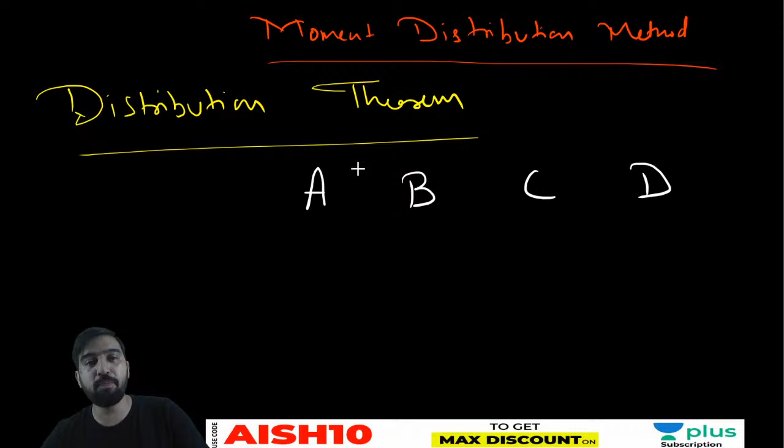See my dear friends, I'm starting in the same manner by which I started in the marathon. So, distribution theorem - it is a story of 4 persons who are staying in a room, sharing a common room, and they are taking lunch or dinner together.

The capacity of A is taking 2 rotis, B can take 4 rotis, C can take 6 rotis, and D can take 8 rotis. So the total number of rotis which they 4 can take together is 20.

Is it clear? Okay, now what is happening? One day, due to some reasons, the available rotis were only 10 in place of 20.

So now tell me, dear friends, what would be the distribution? So will all A, B, C, D take rotis in proportionate amount, or will D take 8, A take 2, and B and C remain hungry? How is it going to be?

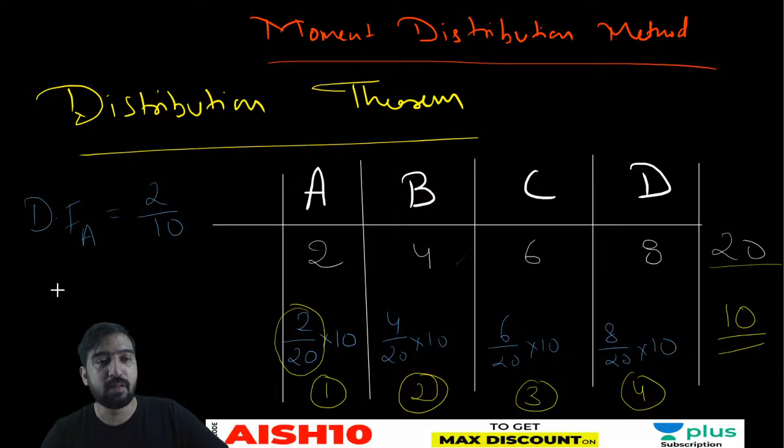If I write here, distribution factor for A is 2 by 20. Distribution factor for B is 4 by 20. Similarly, for C, it is 6 by 20, and for D, it is 8 by 20.

Isn't it? Okay, so what is the methodology to get the distribution factor? Here you have seen the individual eating capacity of A, and when the total number of 20 rotis were available, he was eating 2. So individual eating capacity of a person divided by the sum of eating capacity of all the persons staying at a place.

Similarly, the distribution factor of B is the individual eating capacity of B divided by the sum of eating capacity of all members staying there. So if you add the distribution factors of A, B, C, D, you will get 1.

If you are not getting 1, it means you have committed a mistake. So the sum of distribution factor available at a location is equal to 1. For joints, we will be transforming it.

So, distribution factor - how do you define it for a particular thing? Individual capacity divided by sum of capacities. In layman language, you can write distribution factor like this. Now, my dear friends, I am simply transforming it.

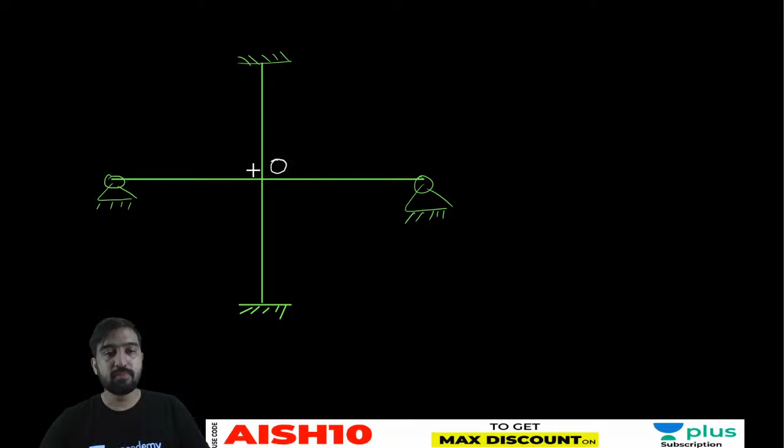Now come to the structures. See my dear friend, suppose I'm having a joint here on which four members are joining. Let's say it is first member, second member, third member, and fourth member. Name this joint O. So it is A, B, it is C, and it is D. Is it visible now, Harshit and Mahima?

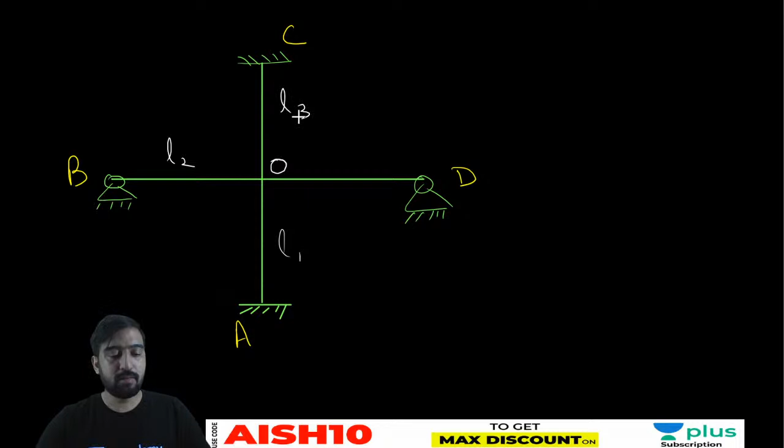So now my dear friend, let's say the length of these members be L1, L2, L3, and L4. And let's say their stiffnesses will be E1, I1, E2, I2, E3, I3, and E4, I4. Okay, so this is a scenario.

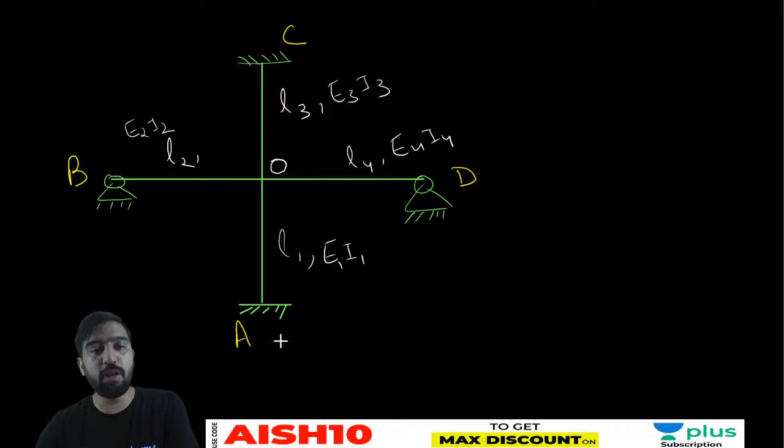So now, if I want to know the stiffness of OA, how can I write it? Tell me, what is the stiffness of OA? Please tell me fast, all of you. What is the stiffness? Yes, 4EI by L. Very good. 4E1I1 upon L1.

Similarly, write it for OB, OC, and OD. Fast. For OB... Okay good. And for OC, it is 4. And OD, it is 3. Okay, yes, it is going to be like this.

So you can consider these stiffnesses as the individual eating capacity of a member. Suppose if I ask how much OA can eat, how many rotis it can eat, you have to say it can eat 4EI upon L1, like that, in normal condition.

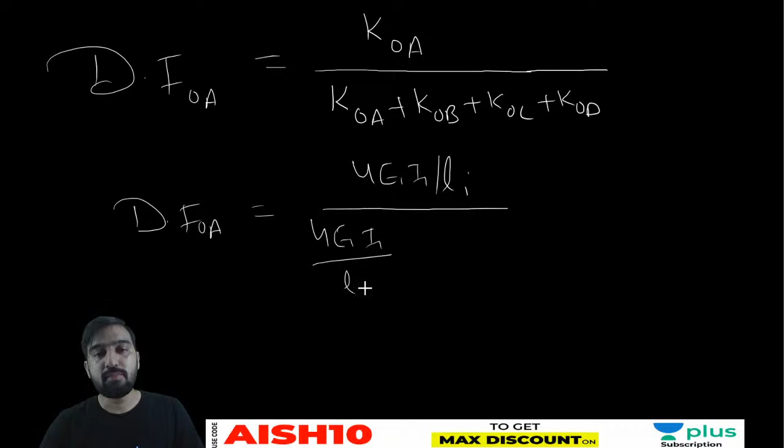So the distribution factor for OA, my dear friend, would be 4EI by L divided by 4EI by L plus 3EI by L, because for OB it is 3EI by L, plus OC 4EI by L plus OD 3EI by L. Okay, so this is the distribution factor, this is the exact way of calculating it, or you can write it like this.

Distribution factor of OA is K-OA divided by the sum of the stiffnesses available at joint O. Is it clear to all my dear friends or not? Say yes or no, please tell me.

So I am representing this big expression with summation of K. So whenever I am writing summation of K, you have to understand it is equivalent to this. I am not going to write all this again and again.

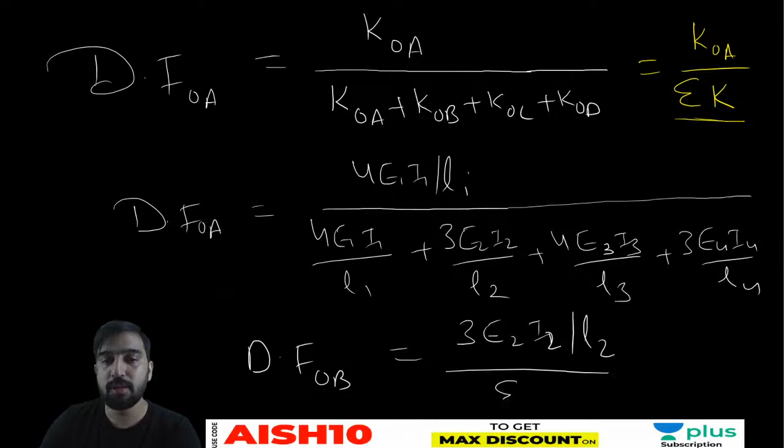So similarly, my dear friend, if I want to write the distribution factor for OB, it is 3EI by L upon sum of the stiffnesses. Similarly, for OC, and similarly for the last one, OD, it is K-OD divided by summation of K. Is it clear to all my dear friends?

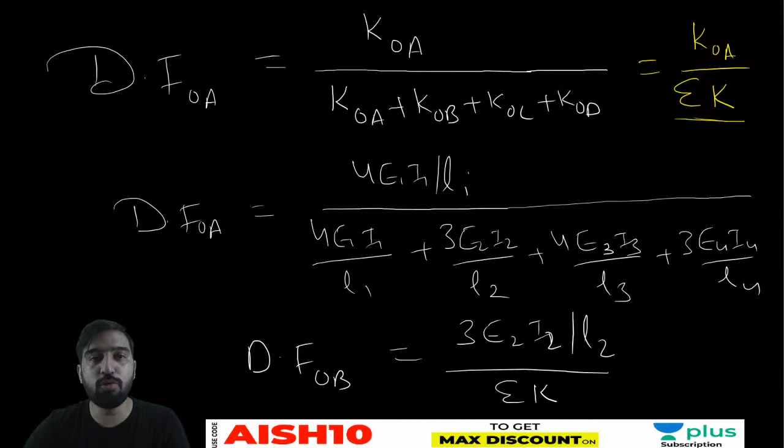And yes, obviously, if you are doing the sum of the distribution factors, the sum of distribution factor at a joint is equal to 1. Suppose you want to do the sum of distribution factor at joint O, then it will be DF-OA plus OB plus OC plus OD, and the denominator portion for all these 4 members is same, and the numerator simply gets added. So the sum of numerator will also be equal to K-OA plus K-OB plus K-OC plus K-OD, and if you add them up, you get the value 1. So the sum of distribution factor available at a joint is equal to 1. That is the funda here. Is it clear to all my dear friends? Tell me, is it clear to all?

One important note here: the sum of distribution factors available at a joint is equal to 1. So now my main task is, for which I am going to study all these things: if I am going to apply some moment at joint O, suppose here OA, OB, OC and OD.

For example, let's say the distribution factors are 0.3, 0.2, 0.3, 0.2. You can see the sum is equal to 1: 0.3, 0.2, 0.3, 0.2.

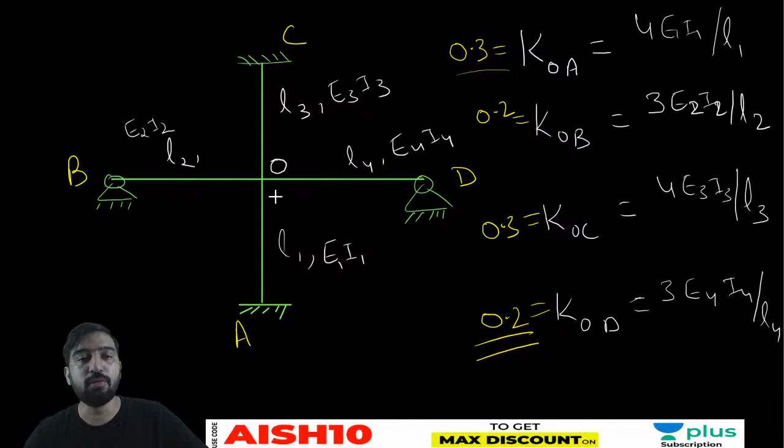Now my question is, listen to me carefully. I have assumed this value, 0.3, 0.2, 0.3, 0.2. So now if I am going to apply a moment of 100 kilonewton meter at joint O, then what would be the bifurcations? How much moment is going to transfer in member OA, OB, OC and OD? Tell me.

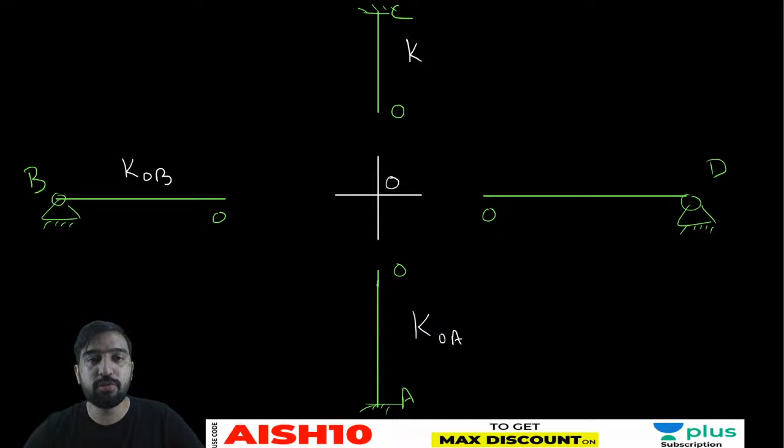So stiffnesses here were 4EI by L. Let me call it simply KOA. Now you all know how to write KOA, how to write the distribution factor of OA. Stiffness here were KOB, it is KOC, it is KOD, and you know how to calculate the distribution factor here.

So distribution factor here would be DF OA, it is DF OB, it is DF OC, and it is DF OD. I hope you now know how to calculate DF OA, OB, OC and OD.

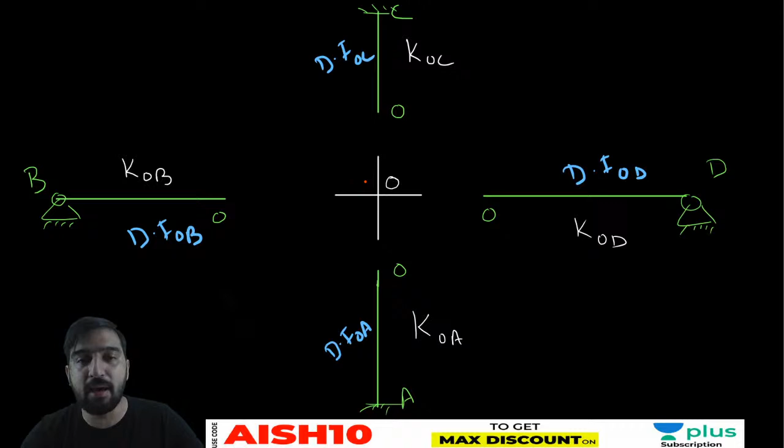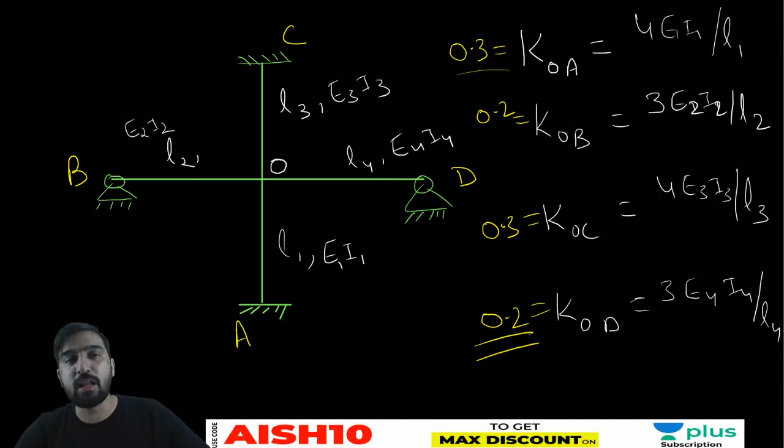So now, my dear friends, if I am going to apply a moment M here, let's say I am applying a clockwise moment M naught, then this M naught is actually claimed by all four members, and in what amount they are going to claim, they will claim as per their particular distribution factor. In the very first example by which I started my class today, the distribution factor for A was 2 by 20, when 10 was available there.

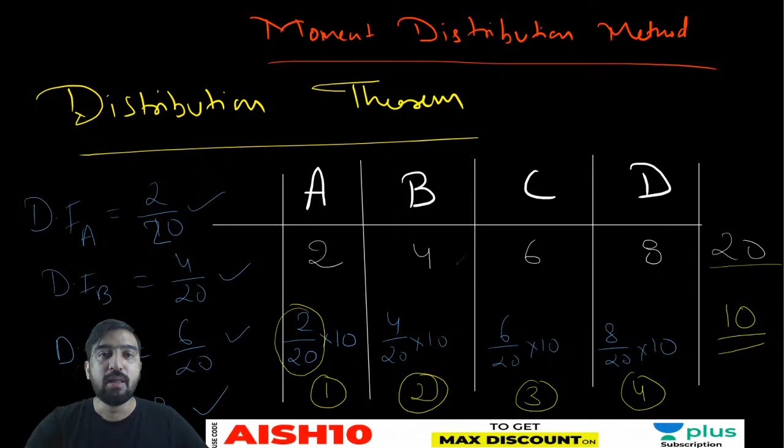So how do you determine the number of rotis there? 2 by 20 out of 10. Now distribution factors here are known for all these four members OA, OB, OC and OD. So now if I want to know out of this M naught how much is going to transfer to OA, to OB, to OC, to OD, then again you can calculate them as per the distribution factor of OA, OB, OC and OD. Similarly, if I want to write the distribution factor of OA, you know it is KOA divided by summation of all these stiffnesses.

And similarly, now if I want to find the moment carried at O, let's say it is MOA. So how can I write MOA? Please tell me if you are agreeing with me. MOA is going to be equal to distribution factor of OA into moment. Similarly, if I want to know what is MOB, then how can I write MOB?

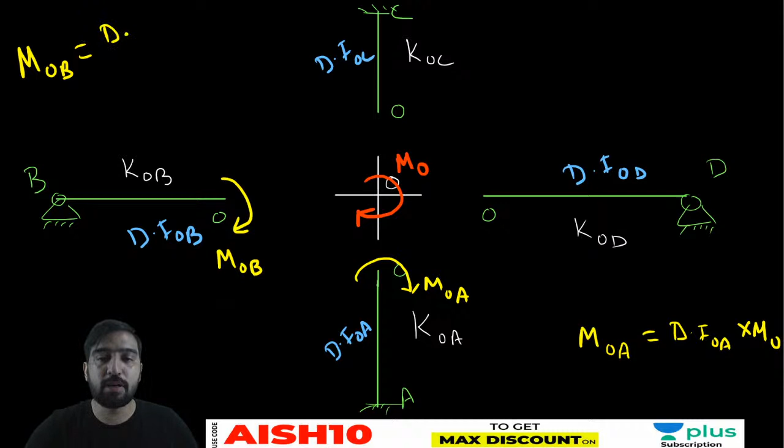So MOB is equal to distribution factor of OB into M naught. Similarly, if I want to write MOC, it is distribution factor of OC into M naught. And yes, if I want to write MOD, then MOD is also equal to distribution factor for OD into M naught.

Okay, is it clear to all my dear friends? Tell me. Okay, and this is clockwise. It is also MOB, it is also MOC, MOD, MOC. Is it clear?

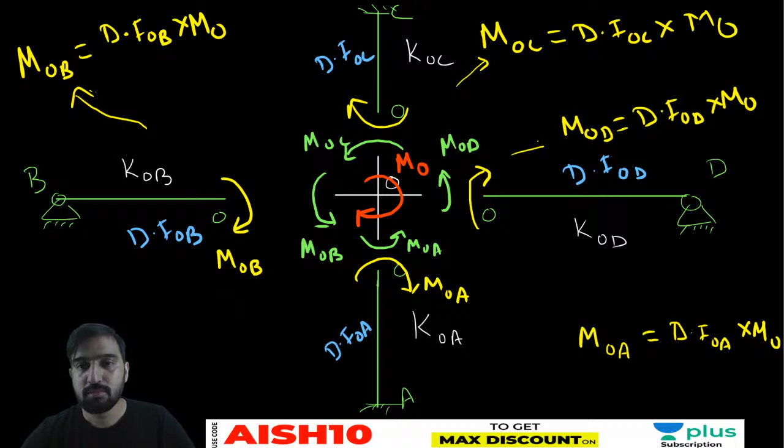Is it clear to all? So I have given KOA as 0.3 and M naught was equal to 100. So 100 into 0.3 is 30. So like that you have answered. Is it clear to all, my dear friends? Please let me know if you are having any doubt so far.

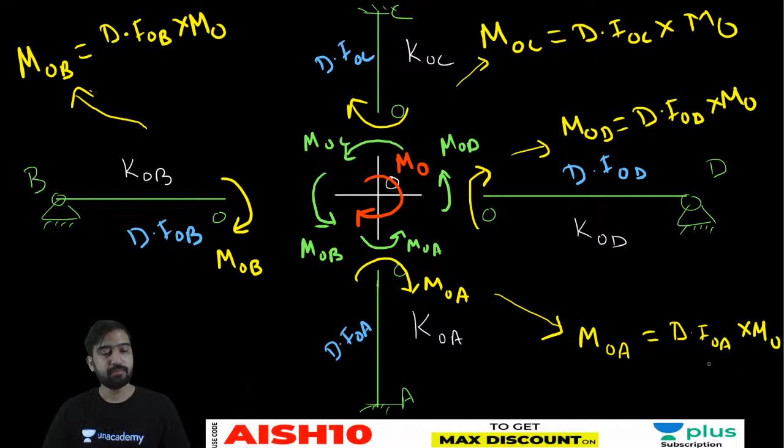So a lot of new names I have seen today. Have you gone through my earlier videos? Swati, Astha, Annadurai, Piyush, okay started 2-3 days earlier, Shri Joshi. So guys, have you gone through my earlier videos? Okay, okay, great.

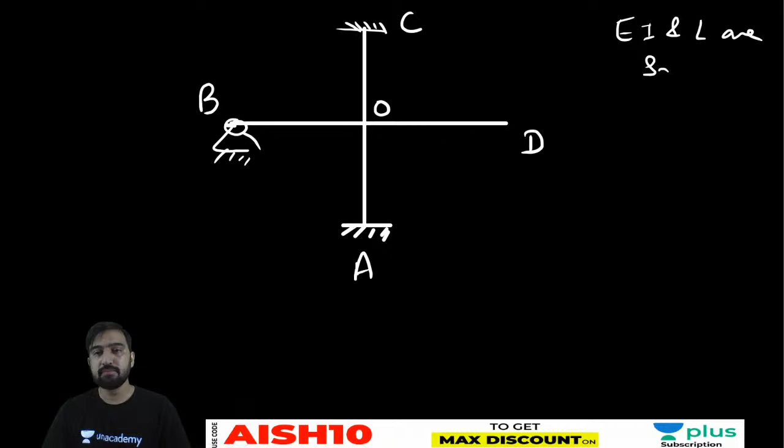Just tell me the distribution factor for all these four members. EI is same for all four members, EI is same and length is also same. EI and L are same for all members.

Just tell me the distribution factor, my dear friends. Thanks, Shri Joshi, thanks.

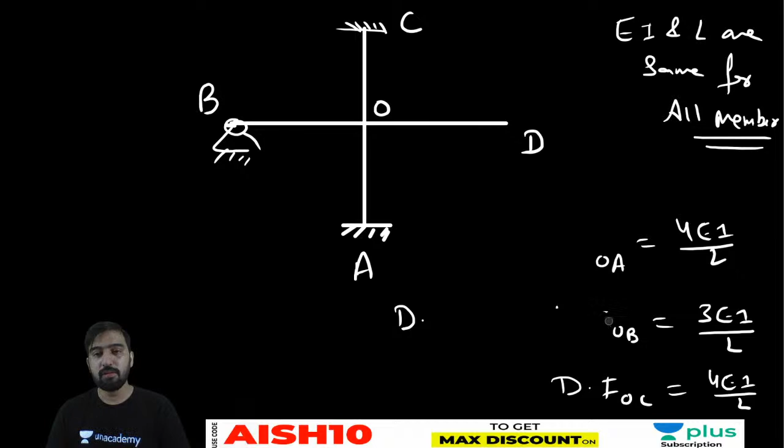Okay, so based on this, its distribution factor would be 0. So it is 4, 7, 11, so 4 by 11, very good. Very good, Shubham. Ayush, good, 3 by 11. 4 by 11, yes, very good.

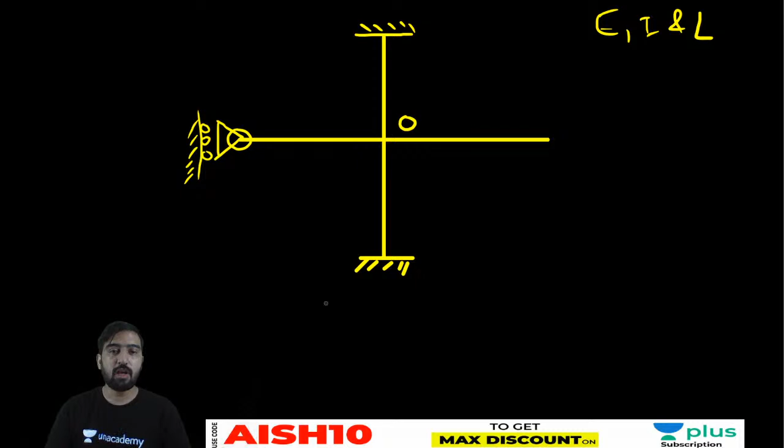Now tell me for this scenario. Again EI and L is same for all these four members. Now guys, tell me the distribution factor for OA, OB, OC and OD. Fast. EI and L is same for all four.

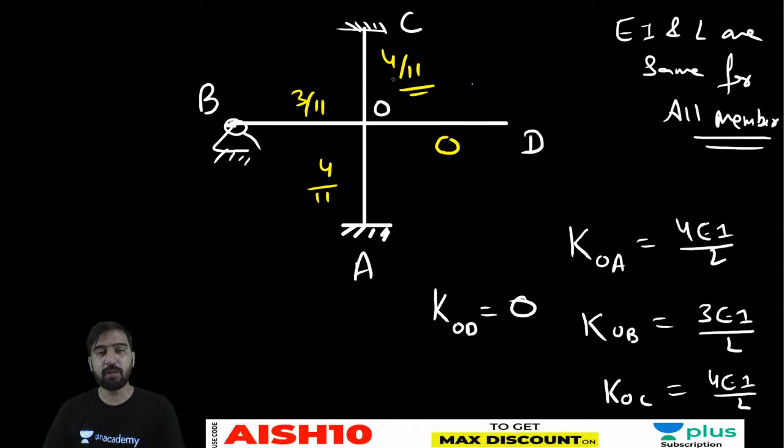Akash, you are saying 3 by 8, for what? 3 by 8? No, it is 3 by 11, my dear friend. It is 3 by 11 only, not 3 by 8. Very good, Shubham, very good, Shubham, very good.

OA and OC, you are saying it is 4 by 11. No. Okay, Ayush, no problem. Yes, Mukesh, Shubham right. Piyush right.

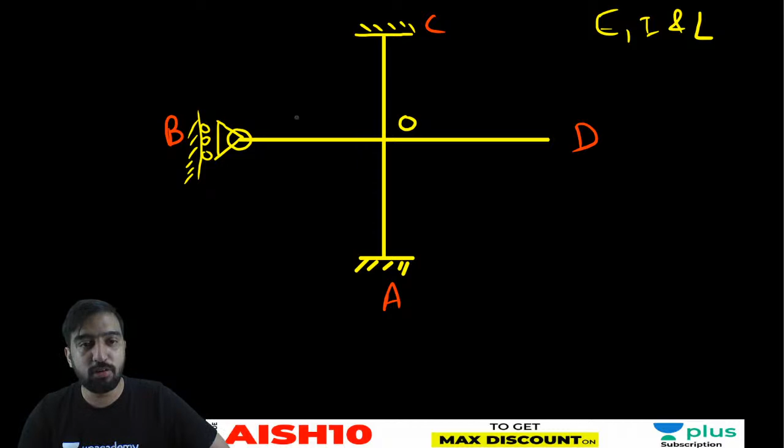So this is 0, this is 0, this is 4EI by L, this is again 4EI by L. So now when it comes to the distribution factor, it is going to be 0.5, 4 by 8, 0, 0.5, 4 by 8 and 0, isn't it? So it's not about roller or hinge, it's about the orientation. Along this orientation, it is free to rotate.

And similarly, my dear friend, I am just changing the question. I hope it is clear to all. I am just changing the question. Suppose D is like this. Suppose D is like this. Now tell me, what is going to be the distribution factor? All of you, tell me, my dear friends. E, I and L is same for all. What is going to be the distribution factor? Please tell, my dear friends. This one is interesting.

Okay, only OB is 0, Piyush is saying. What about others?

Four, four, three. Four, zero, four, three. Very good, awesome, good. See here.

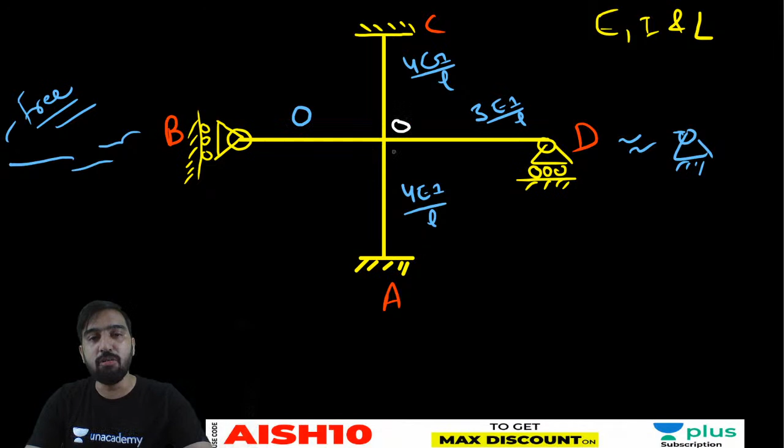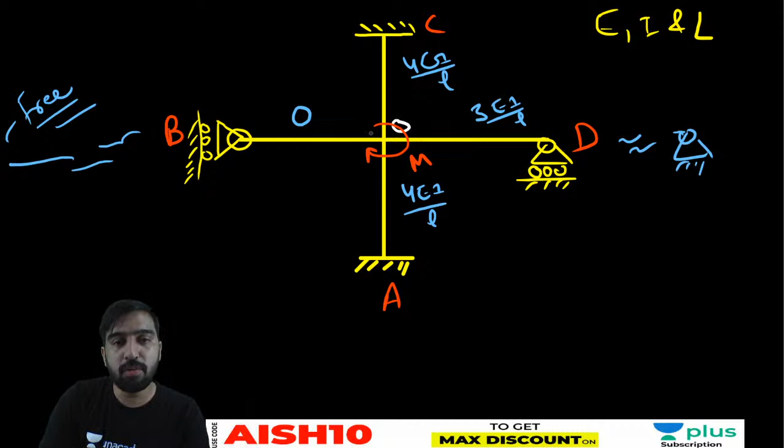Then it would be like this. It would be like this. Okay, and it would be like this, and it would be like this.

So is it understandable? Is it understandable, Mahima? Is it okay, Mahima?

So see, no constraints are here. The roller support is simply going to translate. Is it clear? So I am saying, in spite of having similar support conditions at B and D, D was able to resist this movement, but B is not.

Here B is also roller hinge, here D is also roller hinge, but it is acting as a hinge support while the other acts as a free support. Because by providing this roller, there is no benefit of providing this hinge.

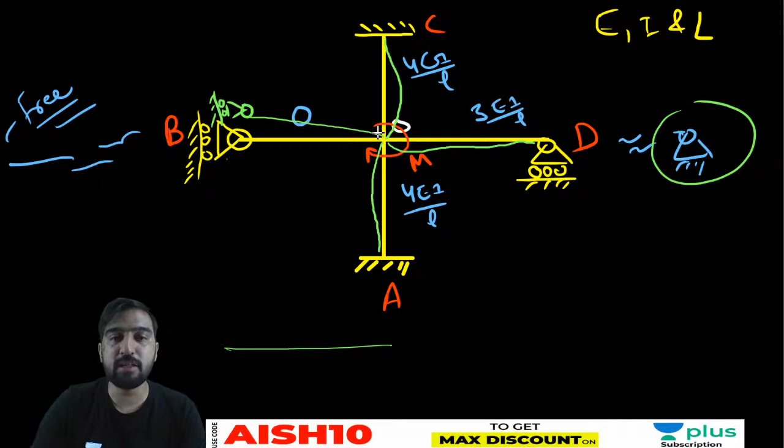Okay let me explain this, Akash. In the one where a roller was given, yes my dear friend, theta would be same. You can calculate theta here, you can calculate theta here, you can calculate theta here. So theta has to be same. If a joint is rigid, so theta has to be same.

A good book for practice is Ramamrutham, n number of questions are there, very good book, Ramamrutham, for practicing. And if BC Punmia is there, still it is fine, but the quantity and varieties of questions are larger, are more in Ramamrutham.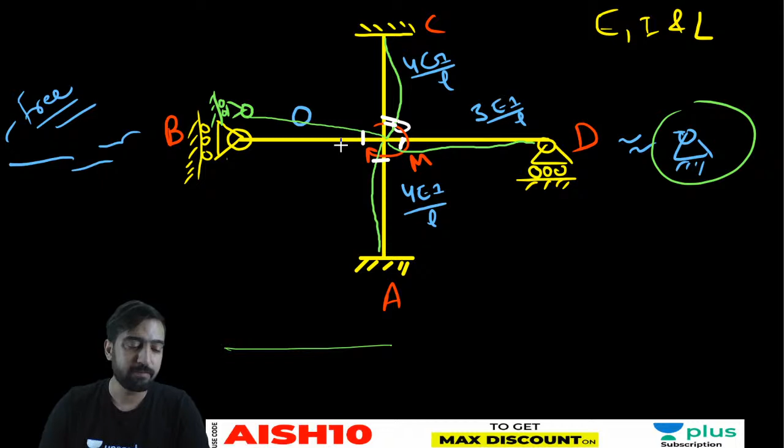So my dear friends, BMD will be discussed only for that question which will be on demand. So by default, I am not going to discuss the BMD.

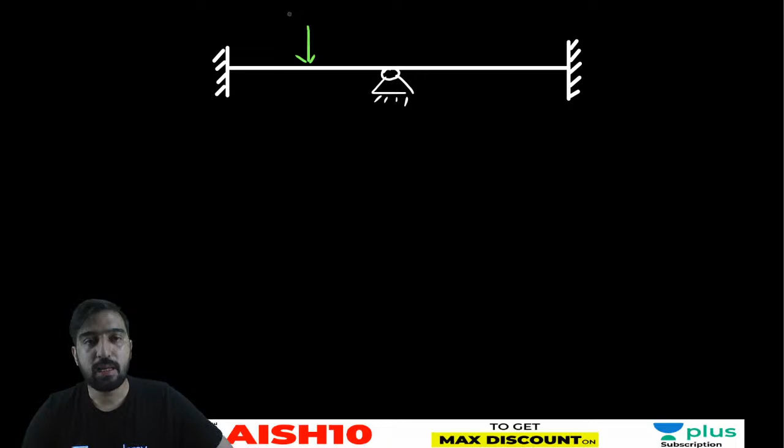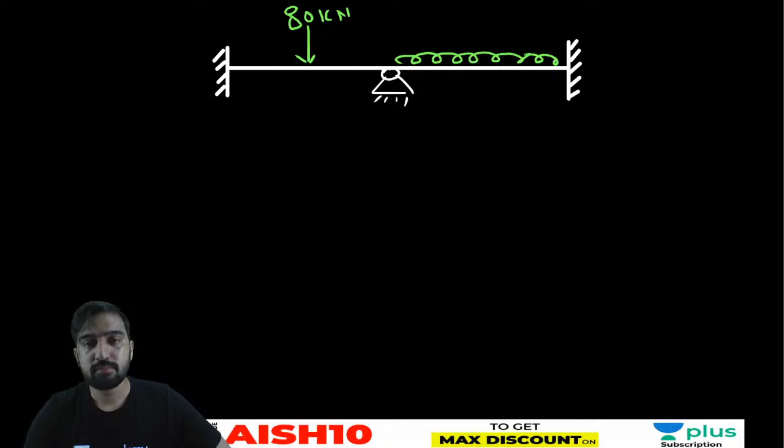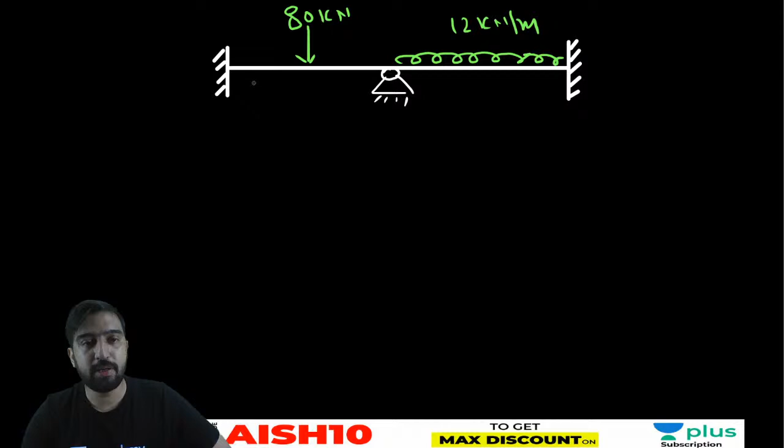So let's say your loads are 80 kilonewton and 80 kilonewton, and let's say it is 12 kilonewton per meter. So it is 4 meter, 4 meter, and let's say it is 10 meter. Okay, keep it 8 meter. Keep it 8 meter.

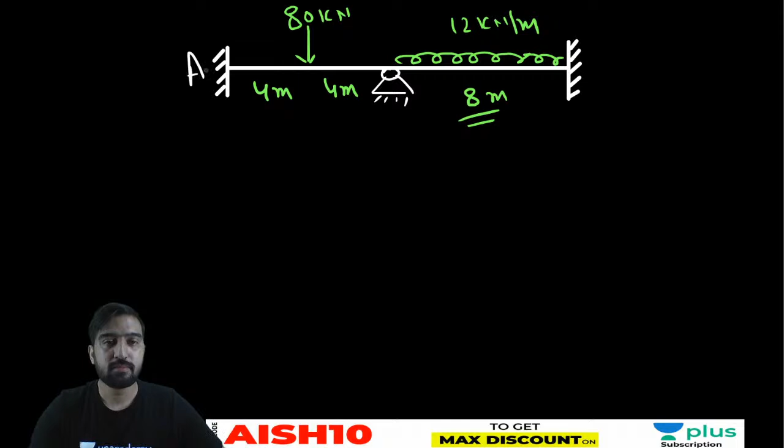So A, B, C and D. Okay, A, B, C and D. So this is the question here.

So now you have to calculate the moment. First of all, listen to me very carefully. The very first task which I have to do after seeing the question on displacement approach is to calculate fixed end moment. And if it is a question from moment distribution method, then also we have to calculate the distribution factor. So the fixed end moment here,

MFAB is minus PL by 8, minus PL by 8, minus PL by 8, it is, isn't it? So fixed end moment is minus 80, anti-clockwise 80.

And similarly MFBA is PL by 8, clockwise 80. Similarly, if I am calculating the fixed end moment for MFBC and FCB, so MFBC is equal to minus WL square by 12, so minus 64. And similarly MFCB is equal to 64.

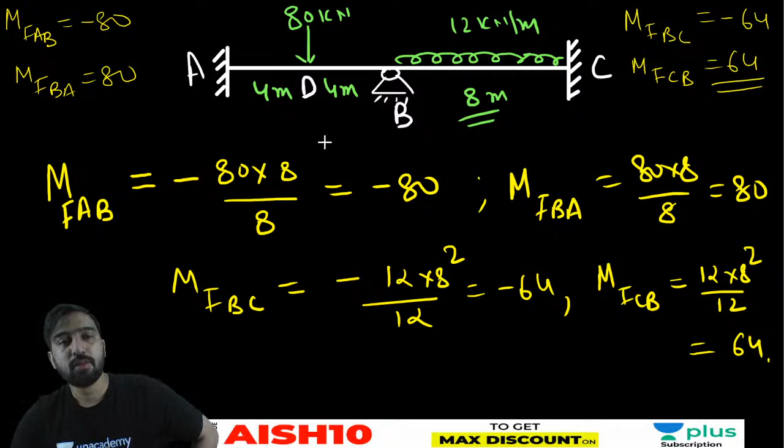So these values are going to be, let me write here. MFAB is equal to minus 80, MFBA is equal to plus 80, MFBC is equal to minus 64. Okay, so these are clear. This must be clear to you. Any doubt so far?

Now next task is to calculate the distribution factor. See how you are going to calculate distribution factor. First of all, you will write joint. After that, you are going to write member. Then after that, you will write stiffnesses, joint, member. After that, you have to write stiffnesses. After that, you have to write summation of stiffnesses. After that, you have to write distribution factor. Okay, so joint, member, stiffnesses. This table you have to use for calculating distribution factor.

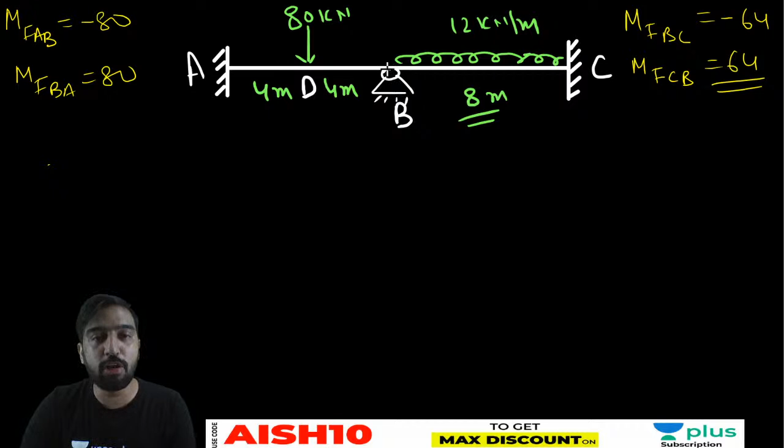So B is not going to move in its vertical direction. So whenever I am applying any rotation or movement here, for this the far end will be treated as A. For this the far end will be treated as C. So conditions would be equivalent to this. If I'm going to rotate it by theta, so stiffnesses will be 4EI by L. Is it clear to all my dear friends?

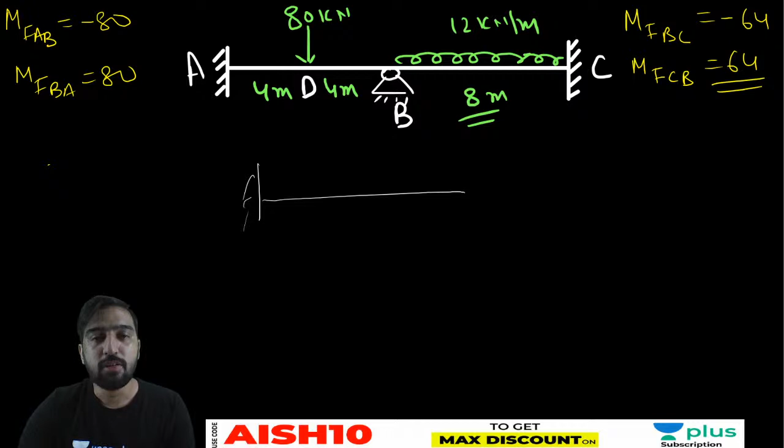Okay, so now see here, 4EI by L. What about L? L is here 8 meter. Similarly, 4EI by L, L is again here 8 meter. So stiffness is 0.5 EI and 0.5 EI. And if I am calculating the sum of stiffnesses, then this sum is nothing but EI. So now the distribution factor is 4 by 8 and 4 by 8, means 0.5 and 0.5.

Okay, so here only two members were there, so I have taken only two members. Suppose if there would have been 3, 4 or 5 members respectively, then I have to do like this, BA, BC, BD and all. Okay. So here you can see distribution factor for both of these members are 0.5 and 0.5.

Okay, now listen to me very carefully. Here the fixed end moment was anti-clockwise 80. Here it was clockwise 80. And just right of B, the fixed end moment was minus 64, and it was plus 64.

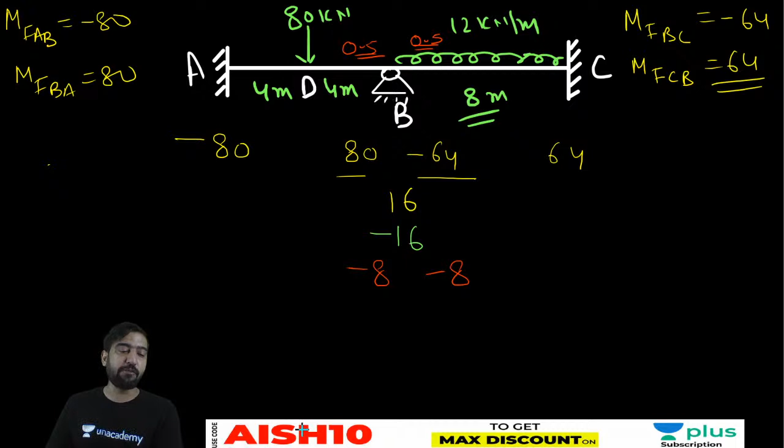So this minus 16, or anti-clockwise 16, is going to have two components: minus 8 and minus 8. So 0.5 times minus 16 is minus 8. Again, 0.5 times minus 16 is minus 8. Is it clear to all my dear friends? Tell me, is it clear to all?

Okay, so this minus 8 and this minus 8 will be the components of member BA and BC respectively. The far end for BA is fixed, and the far end for BC is also fixed, and whenever the far end is a fixed support, the carryover moment is equal to half. So carryover moment is equal to half. So it is minus 4, and it is also minus 4.

Okay, so now my dear friend, the task is over. Now the thing is done. Now the task is over. Just see the final values.

So net moment at A: anti-clockwise 80, anti-clockwise 4, is 84. It is 72: 80 minus 8, minus 64 minus 8 is minus 72. It is 60. So these are, now you can see the net balancing. Net unbalancing at B is 0, so plus 72 minus 72 is equal to 0. So it is minus 84, 0, and 60.

Is it clear to all my dear friends? Tell me, is it clear to all? So these are the final end moments, and after that you know how to plot the end moment diagram. After that you know how to plot the end moment diagram.

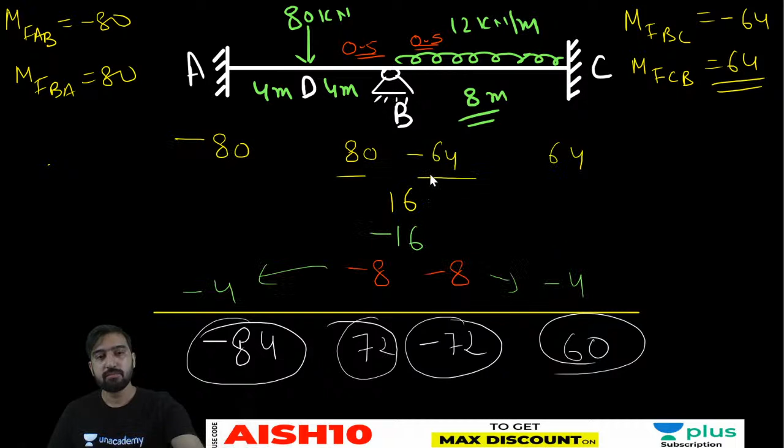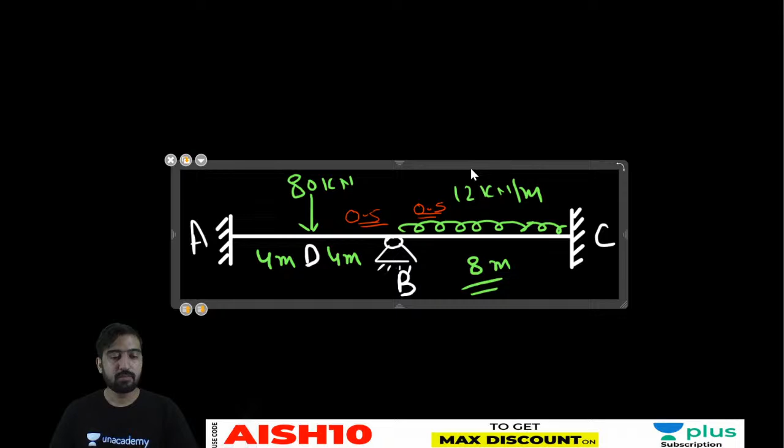See, this is one way of writing, and similarly what I am doing here. See, joint... joint, just a minute.

Joints are how many here? A, B and C. Okay, what about members? Members are: at A only one member AB, at B there are two members BA and BC, at C there is only one member CB. And distribution factor: here distribution cannot be done. Here the distribution factor is 0.5 and 0.5, and here it is nothing. So that's all.

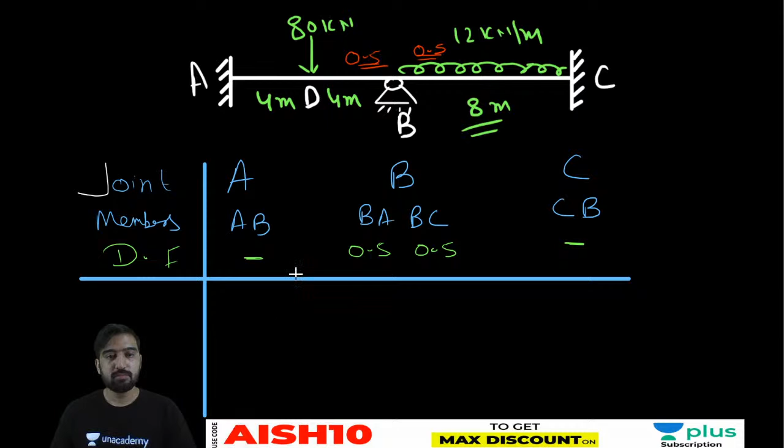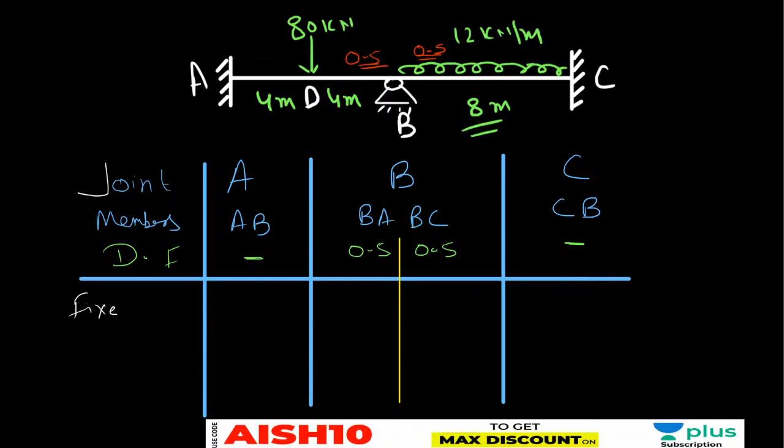Okay, so in order to start, I have to write here the fixed end moments. Fixed end moment: it is minus 80, plus 80, minus 64, plus 64, and the distribution is required here.

So the next step I am going to write is distribution. Distribution will be required at joint B. Total unbalancing is 16 clockwise, so minus 16 is to be distributed into 0.5, so minus 8 and minus 8. Whatever you have remembered so far, this and this is plus, so apply minus and distribute into half: minus 8, minus 8.

And now the carryover is there. So carryover would be half, because far end is fixed. Here as well the far end is fixed, so it would be half.

And now you can see as no unbalancing is available at B, so now you can calculate the final end moments. Final end moment: it would be minus 84, 72, minus 72, and 60.

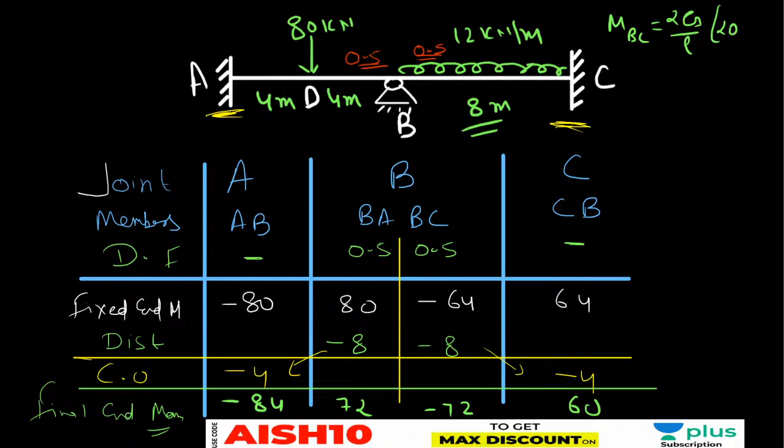Okay, slope B ki direction bataiye. That is not a big deal here. What you have to do, you know it is minus 72. Just see MBC, you know it is 2EI by L, 2 theta B minus the fixed end moment, which was 64. So MBC is minus 72.

It is 4EI by 8 theta B minus 64, so it is minus 64, plus 72. So minus 8 is EI theta B by 2, so theta B is minus 16 upon EI. So it is anti-clockwise 16 upon EI, Mukesh. Is it clear, Mukesh? Is it clear?